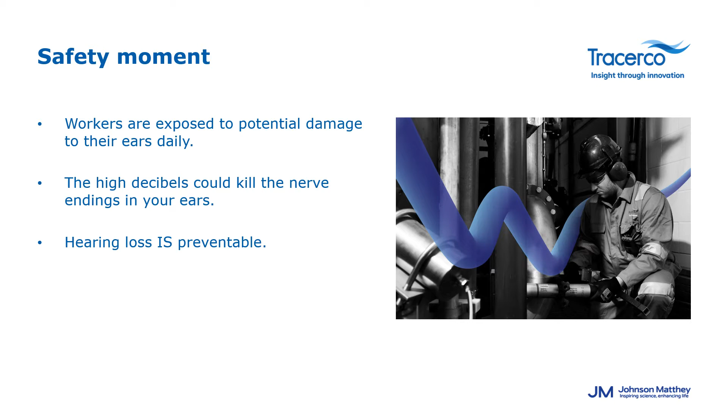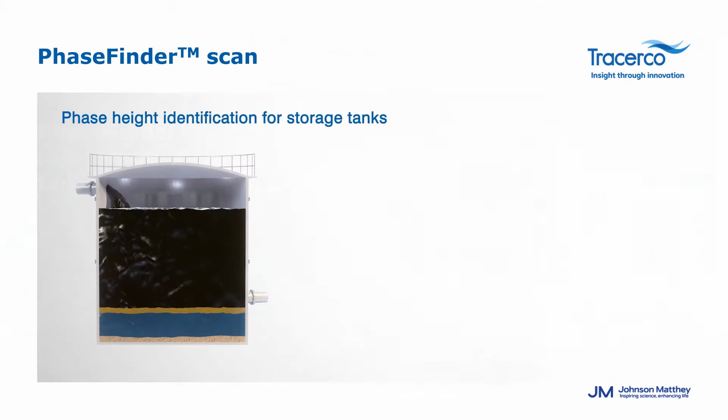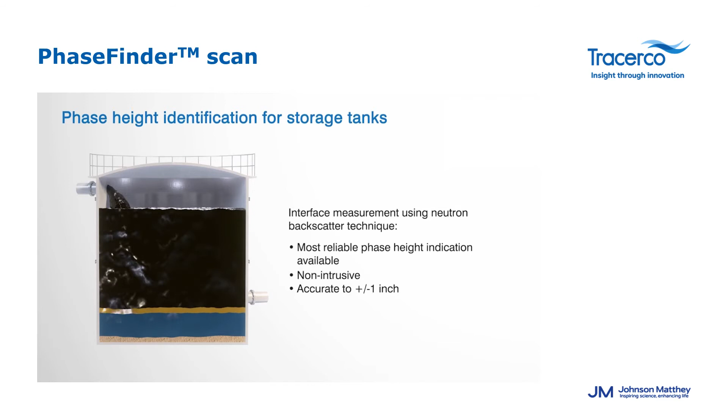The way this works, we have a small radioactive source, except it's a neutron emitting source, and you're able to see the wand here. Both source and detector are on the same side. To really understand what a neutron backscatter entails, imagine it like a floor Swiffer—it's a long wand with a flat head. Essentially what we're going to do is place it on the very top of your tank, slide it all the way down your vessel.

Every time we find a density shift, we will mark it, then repeat the same process until we get to the bottom of your tank. From this point, we can detect the hydrogenous material by the neutrons penetrating through the tank, which is about 6 inches. That material then bounces back, or backscatters, to the detector for a reading. This application is non-intrusive and does not change the composition in your vessel.

In this specific case, an engineer had stated that they were getting ready for a tank cleaning, and they were wondering how many vacuum trucks were needed. It turned out after the test was performed, their level gauge was completely off. We were able to tell them how much sludge, oil, emulsion, water, and even solids were present, and how many trucks were needed in order to clean out the tank properly. This allowed the customer to prepare for maintenance quickly and effectively, all because of our PhaseFinder technology.

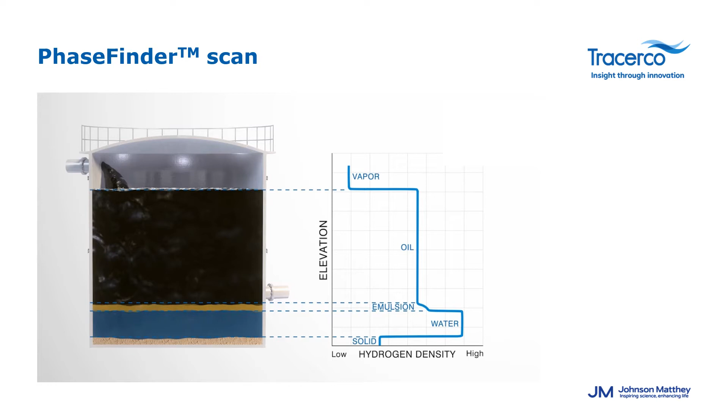In the depiction below, the customer was unloading from a vessel with contents of different combinations, which required an outstanding amount of space and availability within the tank. There was a shipment of feedstock coming which required filling their tank multiple times. Due to the current level gauge reading 23% full and the second level gauge reading 52% full, there was an inconsistency in accurate readings. Tracerco was able to play a vital role to ensure the customer had the accuracy of the level as well as peace of mind once the level gauges were able to recalibrate.

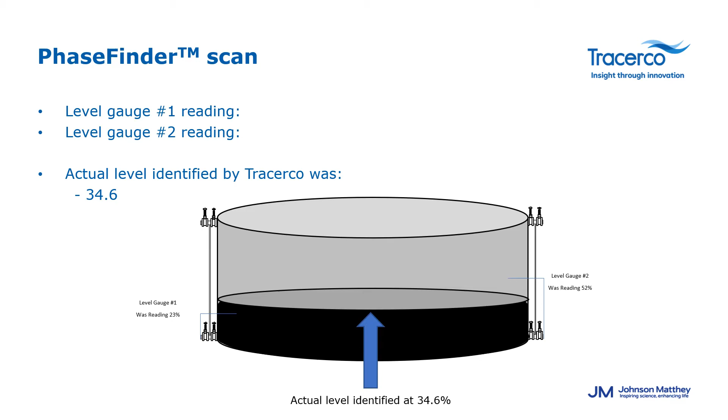Equally important, if you understood how our PhaseFinder technology works on your storage tanks and spheres, we apply the same technology on pipes.

I ask this question all the time to our customers, and well, I already know the answer to it, but do you ever get any plugged pipes within your facilities? I'm sure you know the answer to that, and it is yes. Tracerco's capability is scanning pipes to determine if you have any plugging.

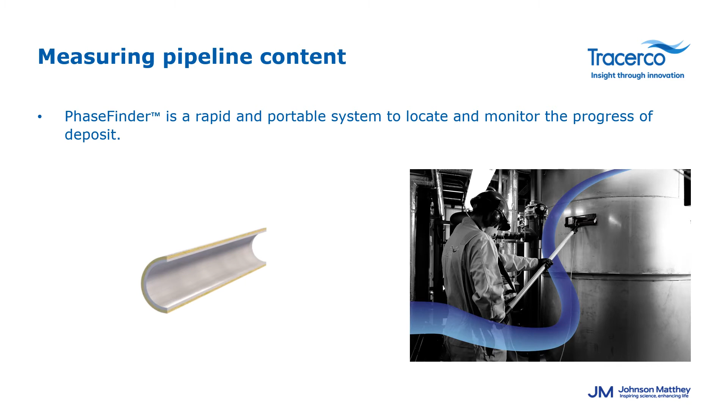Sometimes folks call us out stating they have 1,000 feet of pipe and they want to understand where they might have some plugs so they will know where to heat it up, cut it out, or whatever the case may be. You will then want a more detailed analysis to see what exactly that buildup looks like. So as this animation is running, it's showing you a couple of different techniques to help determine buildup inside your pipes.

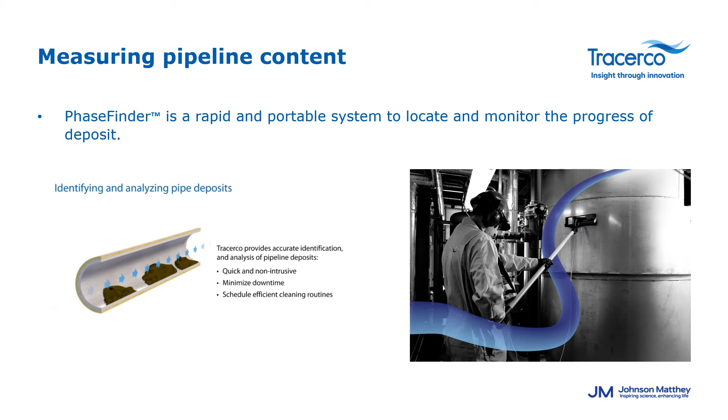This one, instead of working on different density changes like we were discussing earlier, this is related to hydrogen content. As long as there's a hydrogen content difference between the material that's plugging and the normal material in the pipe, it is able to scatter and pick it up.

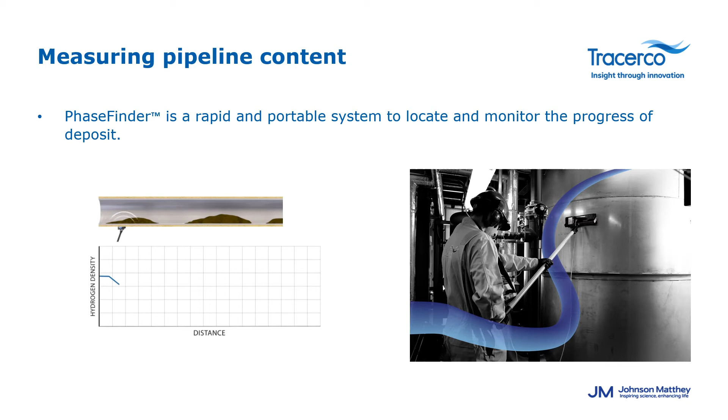Now, if you want to quantify it, we can use a gamma scan just like a column. As long as we know the density of that buildup, we can tell you the exact depth, height, and width. More and more customers have been doing this to determine the exact deposits happening within their pipes. Very useful tool to find plugs in piping.

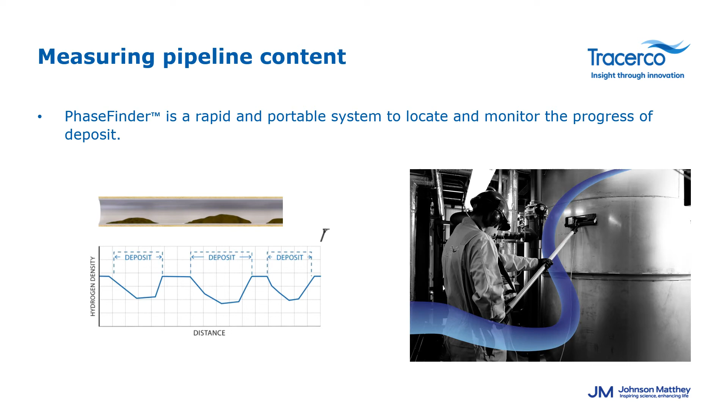Now, if you wish to see the height and how much deposits are occurring in your pipe, if you want to see a little bit more detail, we can also perform a ThruPipe scan. As you can see in the photo above, we have one of our engineers with a source on one side and a detector on the other. Attached to that is a yoke, which will then move all the way down your pipe like a PhaseFinder until that density shift.

Our operations team marks that shift change and then rotates our device 90 degrees. We repeat the same process in the same area. By this, our application can give you an approximate height, width, and depth of the deposits in your pipe. We get called out for this because customers need to know while doing a chemical cleaning, a wash, or even if they must take their line out of service. There needs to be an understanding of how much debris has built up inside their pipe. Keep in mind, like I mentioned before, this scan gives you an approximate height and width of your solids.

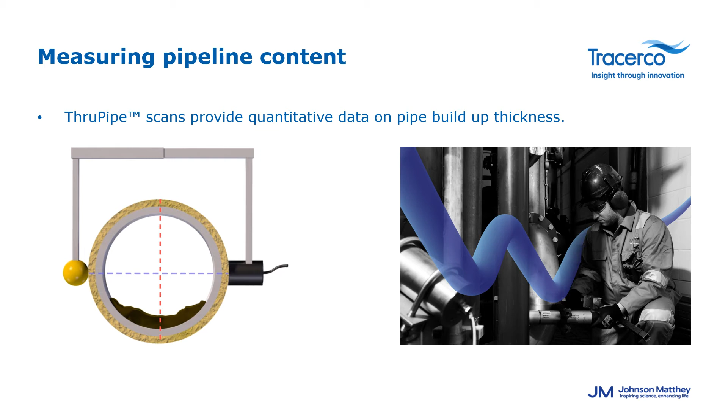For this example, a customer really wanted to get a more detailed circumstance, so we were able to provide a service called our ThruVision Scan. Essentially, if you're unfamiliar with this technology, it's like your basic CAT scan or CT scan.

We will then take your reading of your pipe, use a source and a detector until we get 9 specific data points. This will then give you 1,100 different data points that create a very colorful topographical map like this. This then will tell you how dense your buildups are, the shape of that same buildup, and exactly where it's located. This is one of our most popular applications, especially used on flare lines.

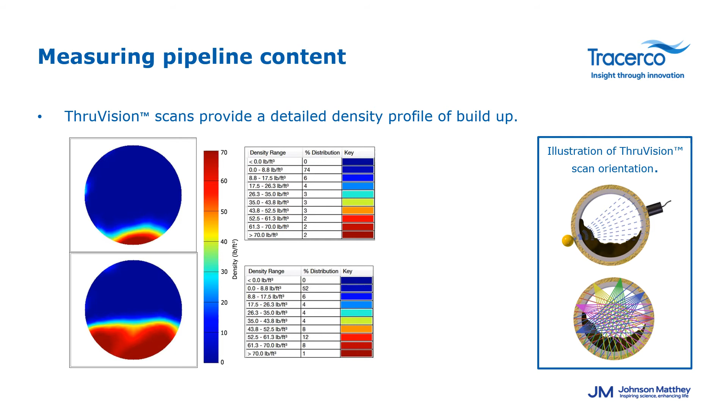This is a very critical part of your process, but it is often overlooked. Luckily for you, we have the technology to determine those density changes that are so important to be aware of.

This next technology is primarily a simple process. We use this flow rate measurement to verify instrumentation. We constantly get called out because there are some folks that have instruments that are highly questionable, so our customers ask us to verify if there are any miscalibrations.

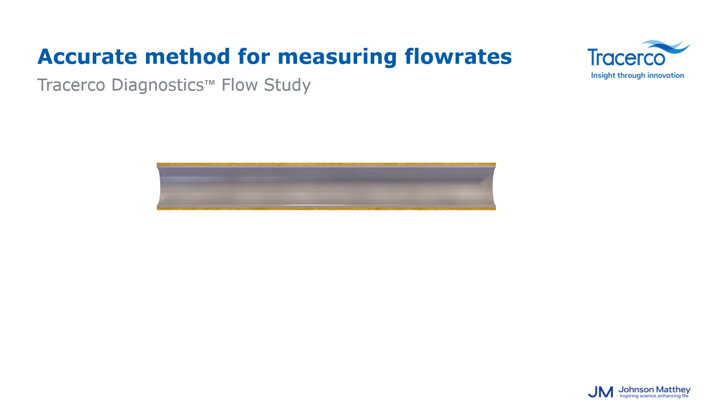So what accurate method does Tracerco use for measuring those flow rates? It's a simple test. We'll inject a small radioisotope upstream where your instrumentation allows a flow down to our detector. This then will pass our second detector, and from that point, it's a simple calculation: flow rate equals distance over time.

The most common use of this technique is to calibrate a flow meter. One example would be one customer buying hydrogen from a neighboring plant who saw his monthly bill increase by $60,000.

The supplier had installed a new ultrasonic flow meter, and they attributed the change to greater accuracy. The buyer's mass balance calculations did not really support that, so he asked Tracerco to measure the flow. We found the flow to be only about 1.4% different from what the buyer had initially expected.

Faced with this verification, the supplier reviewed the new meter setup and discovered that they were using a higher pressure than what the line was operating under to convert to standard cubic feet or density. Using this shows the volume and the value of material. This was caused by several mishaps that led to changes in a scheduled startup and a shutdown period.

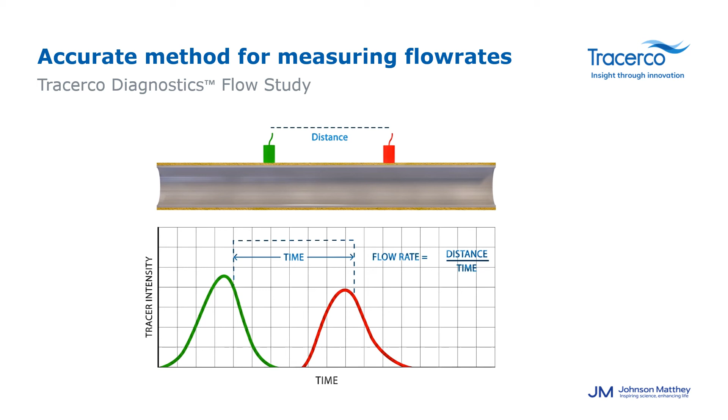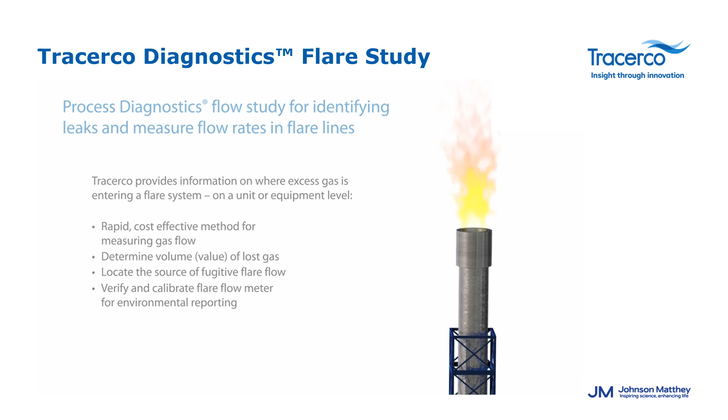Lastly, one of our more popular technologies is isolating fugitive flare emissions, also known as Tracerco flare studies. Now, if you understood the process of our calculations of distance over time equaling flow rate, this is the same concept, except a bit more advanced with more detectors.

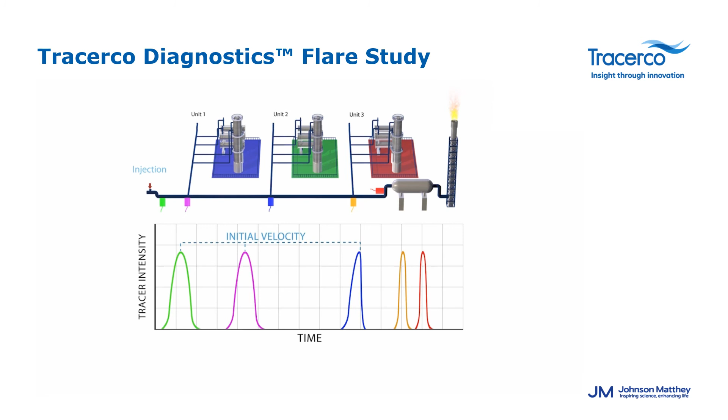Once again, we will take a small radioisotope on the high side of the pipe, allowing it to then pass our detectors, which will be at each one of your units. At this stage, we will then determine an increase of velocity, i.e. an extra amount of gas flowing through your lines.

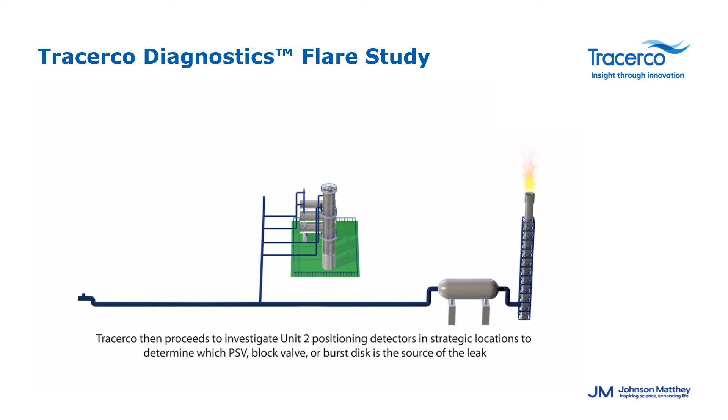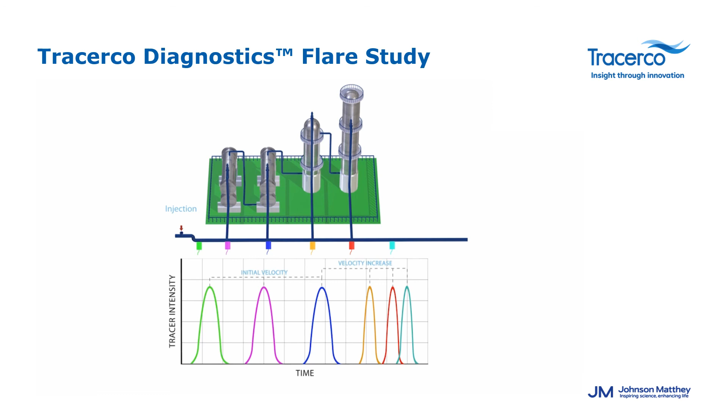In this specific study, an engineer provided information on where he believed there was excess gas entering the flare system. He was unsure on which unit or equipment level it could be. As we configured more and more data, there was an increase of velocity from the second to the third unit. This then indicated an exceeded amount of emissions coming into that specific area.

From that point forward, we understood that it was coming out of Unit 2, which we then isolated again to find out which section of the mishap was happening.

Completing the same setup inside Unit 2, it was then finalized that the PSV was leaking. We were then able to help the engineer measure the flow velocities and isolate where the fugitive flare flow was coming from. With all things considered, the leak was found on the pressure relief valve.

In essence, this is a very powerful tool, and a ton of our customers are doing this test more and more each year because of the new restrictions on flare emissions.

Having those routine pipe and flare system scans allows you to stop worrying about the what-ifs and lets you identify the buildups of deposits before the unexpected.

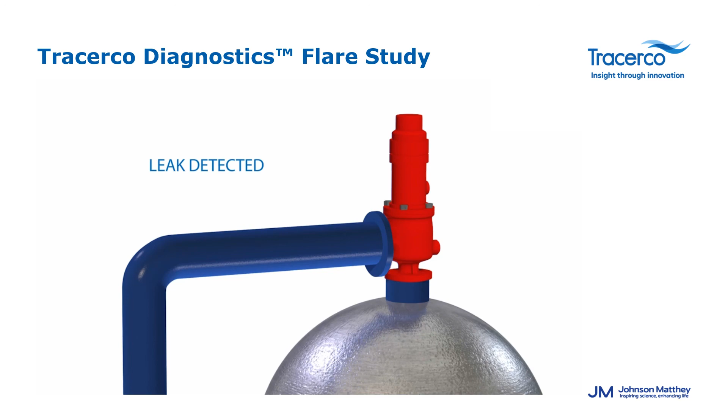This brings us to the conclusion of our presentation. I truly hope this showed you how our different techniques allow for reducing downtime, planning and saving money on upcoming turnarounds, optimizing your process performance, and understanding the value of troubleshooting.